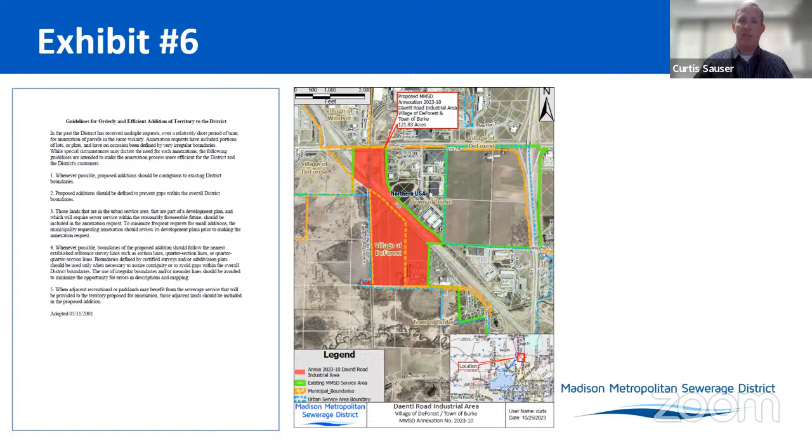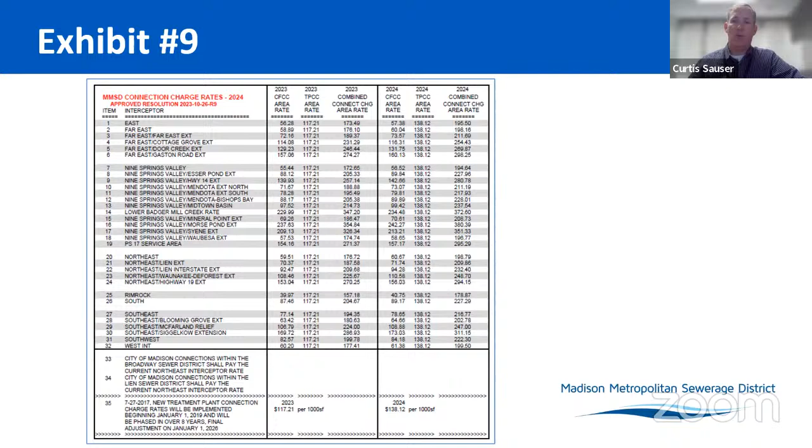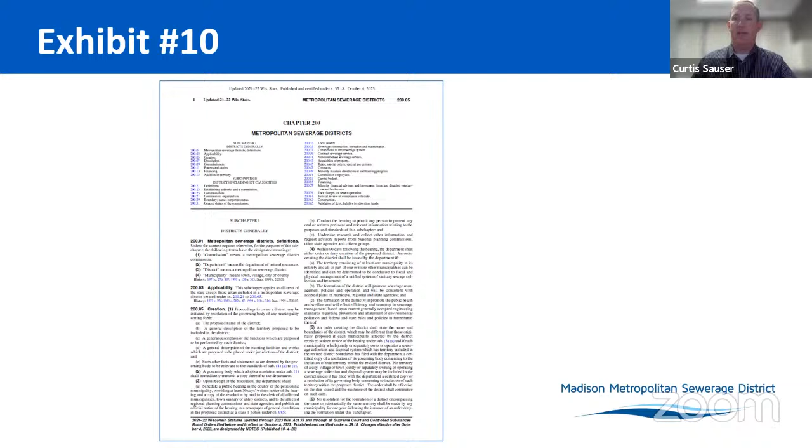And that is all I have to present today. Are there any questions? Okay, thank you, Kurt. Anybody have any questions for Kurt?

Tom? Yeah, just a simple question, Kurt. You know, I couldn't tell from the map and I didn't drive out there. Are there any current buildings that would connect to this, or is it all going to be new commercial construction?

I think the applicant could probably answer that question better, but I know there was a residence in the town of Burke, kind of a flag parcel to the southwest that may be connecting. But I'll let the applicant describe that in better detail.

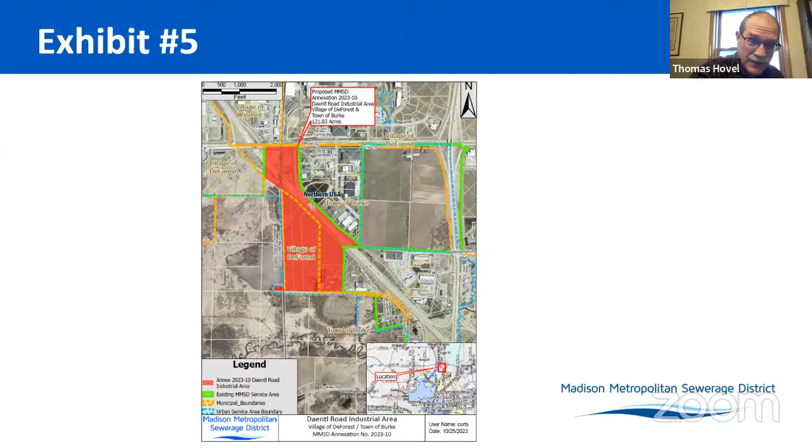Right, okay. So essentially there's not a significant amount of land - you've got an area that's in the district, and the area to the east is out, but then the area to the west you're bringing in. Okay, thank you. You're welcome.

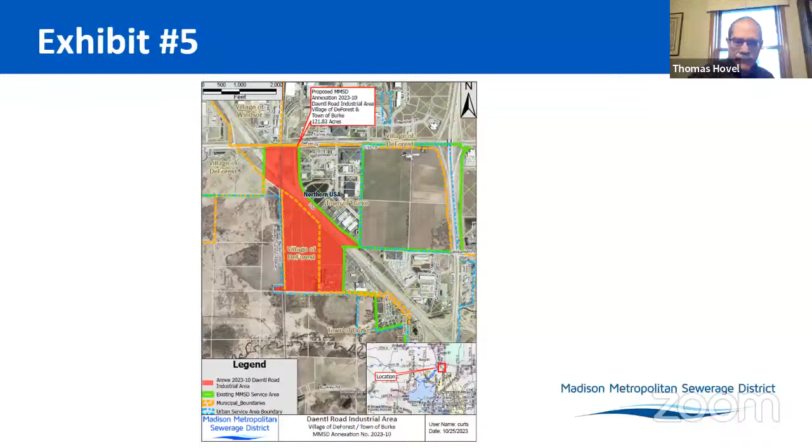Are there any other questions by legal counsel or by members of the commission? Mr. Kent, are there any questions on your end? I have no further legal questions. I've reviewed this in light of the statutory standards, and I have no further questions.

Okay, Mr. Chang, would you have any more questions or comments you'd like to make? And then I'll turn it over to a question by Commissioner Rummel.

Yeah, just simply that we're happy to be here this morning. We are asking for the annexation of the Daentl industrial area to be annexed to the MMSD. Again, we appreciate the opportunity to come before you.

Thank you. Commissioner Rummel, thank you, Chair.

I have a question out of curiosity as a newer member. In the CARPC letter, there's a chart with an X because of the gap. I'm curious when it is that CARPC would say this doesn't meet standards. It's obviously more than one check, but just for background, whoever can answer, thanks.

So I'll go through that chart. Those checks are the criteria set by the commission. They aren't CARPC standards, just guidelines the commission likes to follow, but they aren't hard and fast rules as to whether or not annexation should be approved. I like to provide that background to the commissioners to weigh against the rules they put in place, so you can make a good decision.

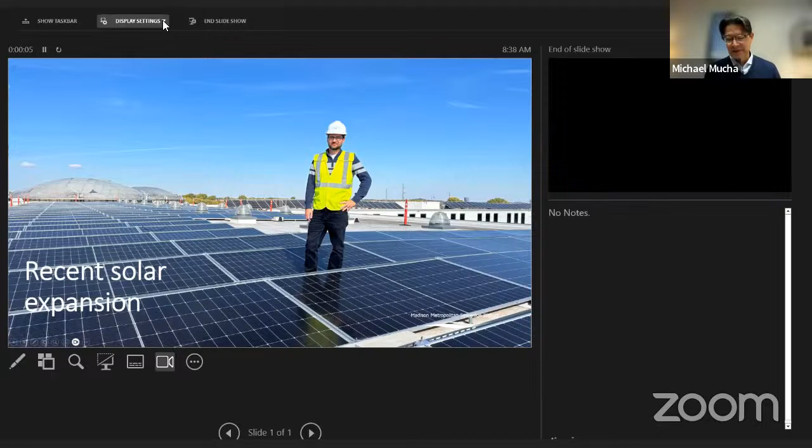Then we'll move to the Chief Engineer and Director's Report, CED update. Michael? Thank you, commissioners, for that action, I appreciate it. I have two items. One, at the meeting last week, I provided really good news on our recent solar expansion project, and Commissioner Freeze had a question that I couldn't answer, and that was, what is the return on investment for this project?

The investment will yield more savings than costs, and will recover our costs in 6 years before the expected lifespan of the equipment. The expected lifespan is 25 years. I do want to point out, though, that if electricity is more expensive, that payback period will be even better in the district's favor. It does not account for the avoided cost for reduced carbon emissions. If we did that type of analysis, the payback in terms of environmental costs would be much better and much more positive. So I wanted to follow up on that, and pause there to see if there are any other thoughts or questions.

Ezra, you have your hand up? Yeah, thanks, Michael, for looping back on this. Quick question would be, are we cash financing this project, or is it debt financing? I'm just kind of curious. Oh geez, I think it's cash, I don't recall. This is Lisa, I think it's cash. I know we're getting some grants for this project, but Lisa, go ahead. Yeah, sorry to interrupt, I think it is cash financing. We are getting some grants for it too. Great, thank you.

Thank you for following up, Michael. I appreciate it.

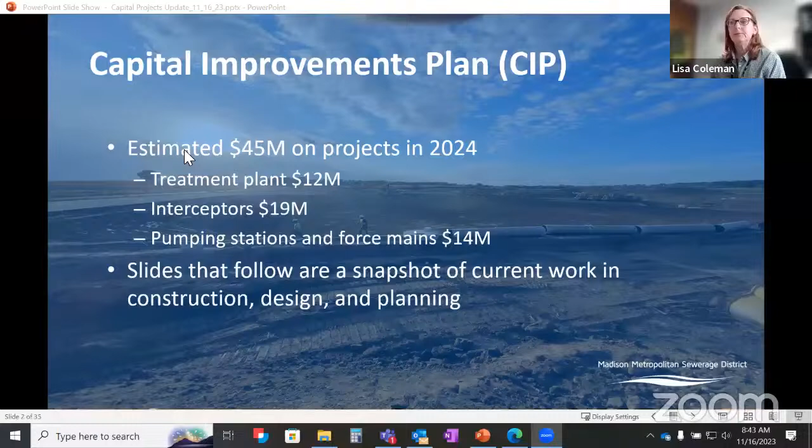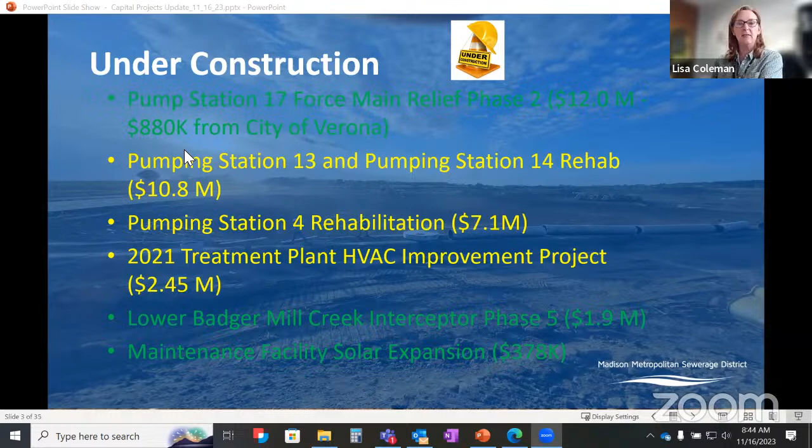Before I get into the details on some of the projects, I wanted to give you a general overview of the pumping station 17 area, as I'll be talking about 4 different projects today that relate to this. We've been working on several projects to upgrade the service area to pumping station 17. When pumping station 17 was built in the 90s, it took the place of the Verona treatment plant and was anticipated to serve a smaller service area. But there's been lots of growth, and lots more growth anticipated in this overall gray area, which is partially city of Madison, partially town of Verona, partially city of Verona, and also town of Middleton. Planning for all this growth has been ongoing for decades.

Some of the northern parts of this ultimate pump station 17 service area developed earlier, and there was a kind of temporary solution implemented at that time by the city of Madison. They have a local pumping station, the Midtown Lift Station, which pumps to a different sewer shed, to a different pump station. This was built as an interim solution until the future district pipe interceptor could be built to convey all that flow via gravity down to pump station 17. Commissioner Freeze probably knows way more about that than I do, so he remembers when all that was happening. And I actually remember when some of that was happening when I worked at the city too.

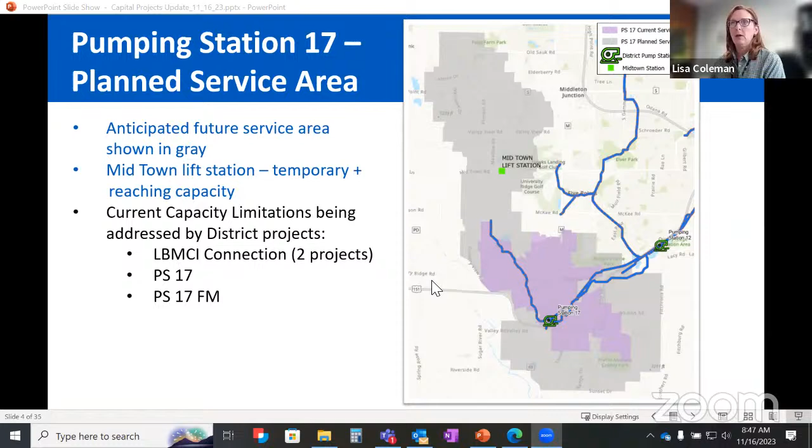Pumping station 17 force main relief phase 2. This is the first construction project underway that I want to give a little bit more detail about. This is a relief force main, meaning we already have one force main and now we're building a second for additional capacity. You may recall we completed the first phase of this project in 2022.

To the west here is a map showing where the force main goes. The phase 1 project was to the west, extending from pumping station 17 in Verona up to this point at the end of the second phase. That project was completed in conjunction with the city of Verona leading the project, since they were at the same time building their East Side Interceptor project. The current project is picking up where we left off and completing the rest of this pipe.

As far as scope, this project is about 8,000 feet of 24-inch force main, shown in red on the map, and 3,300 feet of interceptor, shown in green. It's basically pumped through here, and then when it gets to this point, it flows downhill via gravity to where it hooks up with the Nine Springs Valley Interceptor, and flow heads off to the east from there.

With regard to schedule and status, construction started just this month, so that's very exciting—we've been working on this for a long time. Probably most of the pipe work will start in January. Right now they're just getting set up and mobilizing, but the real serious construction probably isn't going to start until about January.

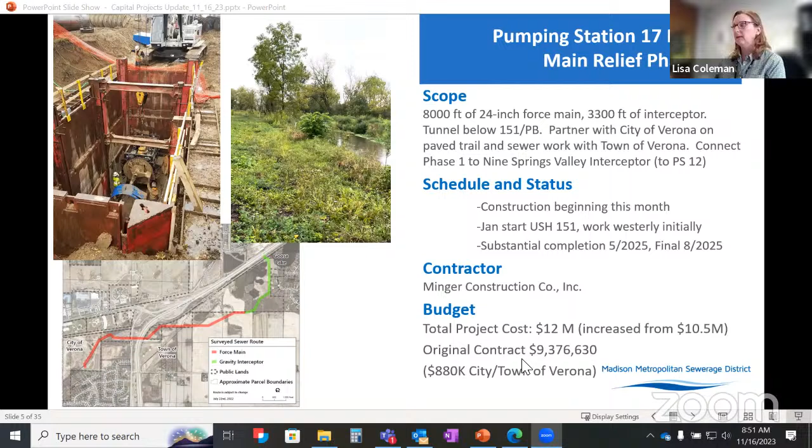One of the nice features about this project is that we worked with a lot of other partners to make improvements along the route that will happen during the project, and some after. Here's a map showing some of those improvements, and our project engineer Rachel worked really hard with all these stakeholders to facilitate this.

Some of the improvements: the City of Verona is doing this paved path, which is part of that cost sharing we talked about. The Ice Age Trail folks are working with us to relocate the Ice Age Trail through here. There's also a number of native plant restorations happening during or after the project in conjunction with the county and the Friends of the Badger Mill Creek Environmental Corridor.

I think it's going to turn out really nice. Some of the restorations are prairie restorations, and there's an oak tree line restoration that's going to happen too.

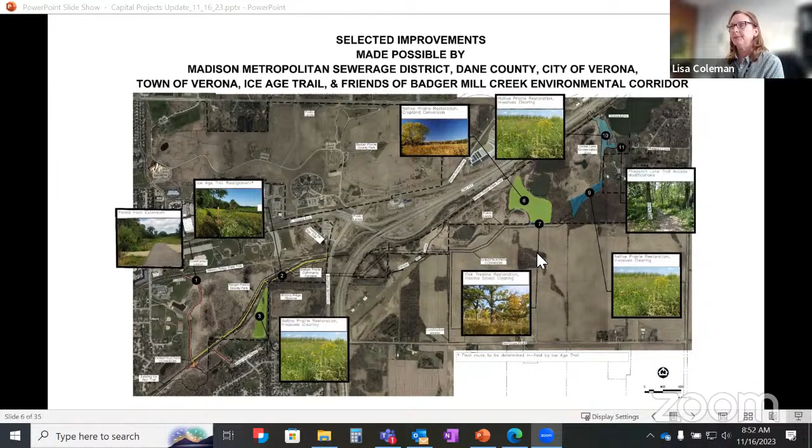Switching gears, let's talk about a construction project that was just completed. You should see an acceptance of work item for this one coming soon. This is pumping station 13 and 14 rehabilitation.

Both of these pump stations are on the far northeast side of Madison. Pumping station 14 is up here on School Road, and pumping station 13 is down here on Amelia Earhart, right by the runways for the Dane County Airport. This is Stoughton Road here, and the airport runways over here.

The scope of this project was replacing pumps and Venturi flow meters, lots of major electrical and control equipment for the stations, and HVAC replacement—heating, ventilation, air conditioning. We also added new emergency generators at these stations with diesel tanks, did some wet well repairs, and some building and site work.

The project began in October 2020, so that was a while ago. This project was one of the first inklings we had of the supply chain issues that came along with the pandemic. We had major equipment delays—some pumps and motors took quite a long time to come in, and some electrical equipment also took a long time.

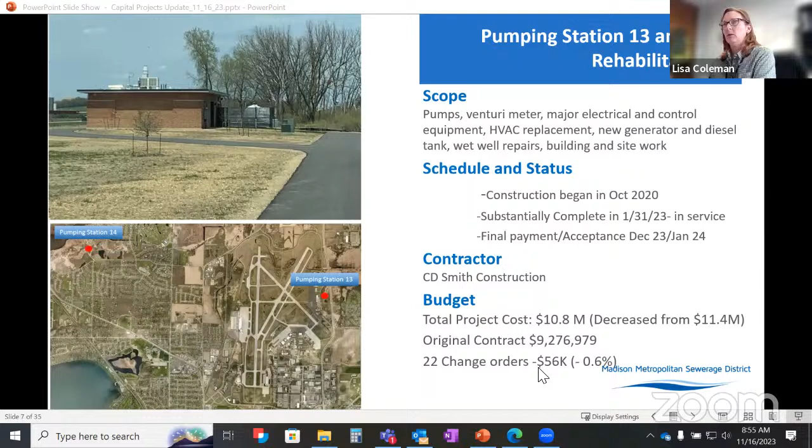Okay, on to another pumping station project that's currently in construction. This one is pumping station number 4, on John Nolen Drive. You can see the location right here—it's right by the Holiday Inn hotel across the street from the Alliant Energy Center, and then a little bit over, the next neighbor over is the Sheraton Hotel.

So kind of in that area, sort of tucked in next to the Holiday Inn's parking lot. You might not notice it unless you happen to be a commissioner, and then you probably would. The scope on this project is pumps, motor control center, instrumentation and controls, HVAC work, another new emergency generator at the station, and some building and site work, including correcting a drainage issue.

This Holiday Inn parking lot has some runoff that runs towards the station that causes problems, so we're going to correct that drainage issue with the project. We bid it right around this time last year, issued a notice to proceed in January of 2023. We were hoping for substantial completion in June of 2024 with final completion in August of 2024. However, no surprise, we're now anticipating some delays due to supply chain issues, in particular the motor control center.

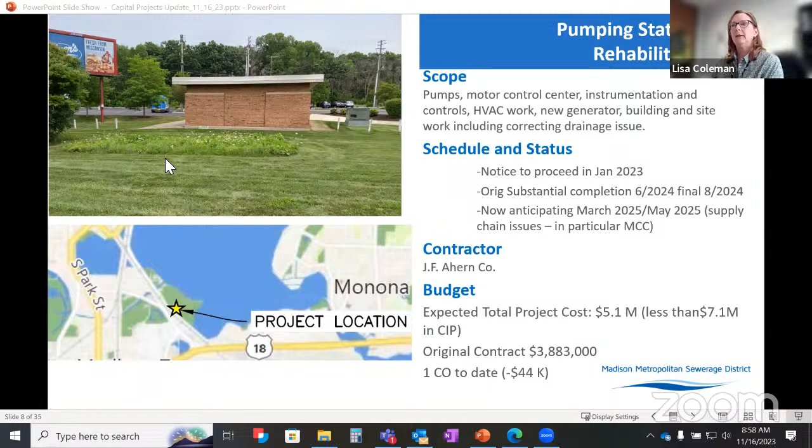Okay, so the last in-construction project I'm going to talk about today is another one of those projects relating to Pumping Station 17 service area that I alluded to a little bit earlier. This project is the Lower Badger Mill Creek Interceptor Phase 5. And again, this is the interceptor that carries flow down to Pumping Station 17.

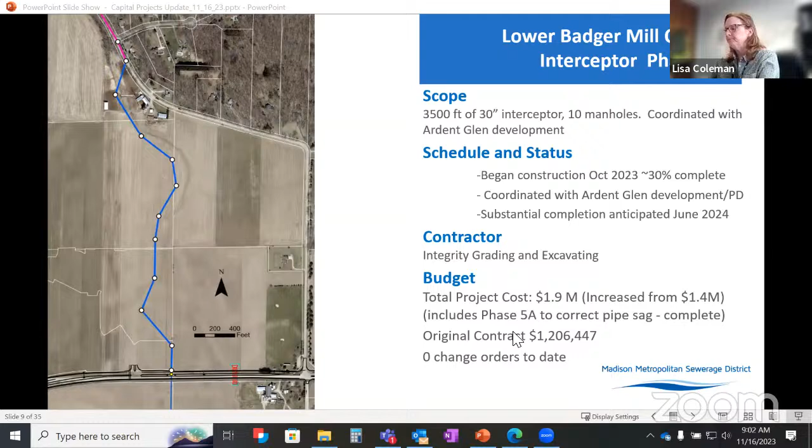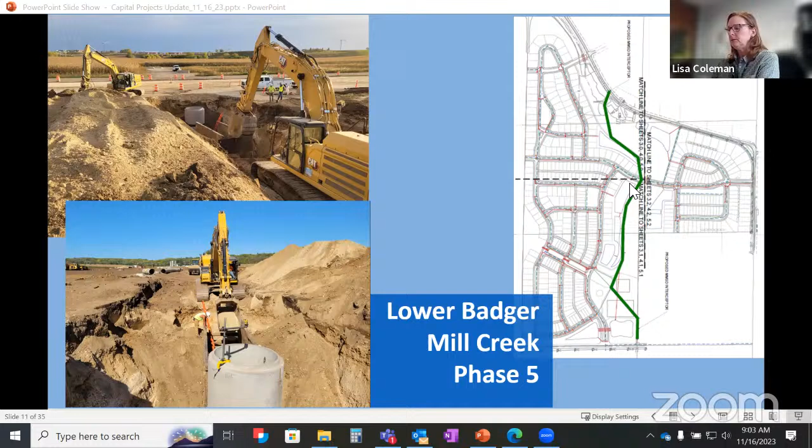First up is a big one, liquid processing improvements phase 2. This one is at the plant, and the scope is really the second part of implementation of the liquid processing facility plan. You might recall a couple years ago we finished up liquid processing improvements phase 1, which had to do with a lot of hydraulic improvements, and also the ultraviolet treatment system in the effluent building was addressed at that time. This is kind of the next chunk of work that goes with that liquid processing facility plan, concerned mainly with the aeration system and the primary treatment infrastructure at the plant.

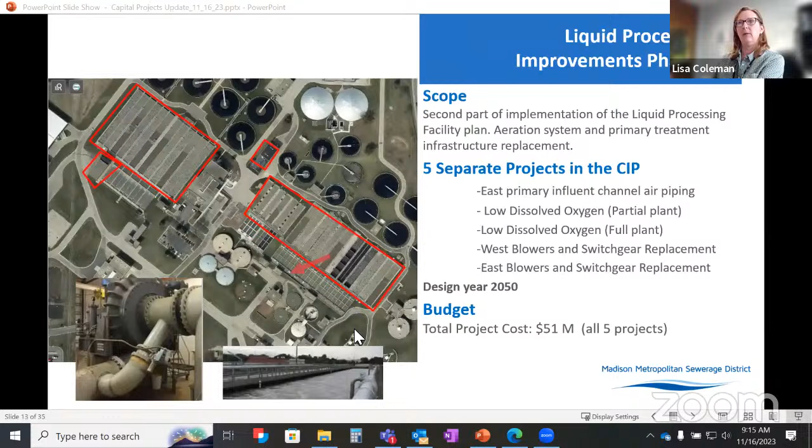And again, transformers, I'm way outside my knowledge base here with electrical stuff, but the transformers are really kind of what steps down the voltage, and then switchgears are kind of like the electrical box at your house where you're turning stuff on and off, sending power to different locations in your house. So that's a really simplistic description, but it explains what we're talking about here.

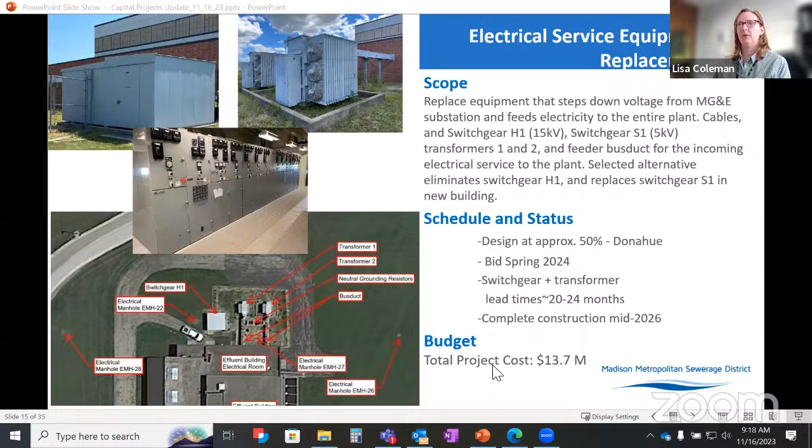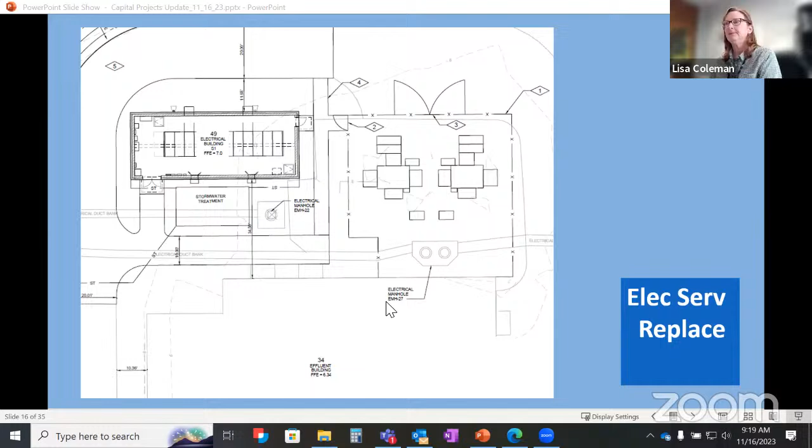Moving back out into the collection system, now let's talk about the Northeast Interceptor Waunakee extension capacity improvements, phase 1.

The scope for this one is really upsizing capacity for a developing area. We are planning to build a relief sewer from the 113/M intersection up to Kennedy Road, and then a replacement sewer north of Kennedy Road. So in some areas we're adding a parallel pipe, and in other areas we're upsizing the current pipe. To plan for this, we took a wholesale look at the whole interceptor, not just the phase 1 part, to make sure what we're planning in phase 1 doesn't hurt anything we plan to do later.

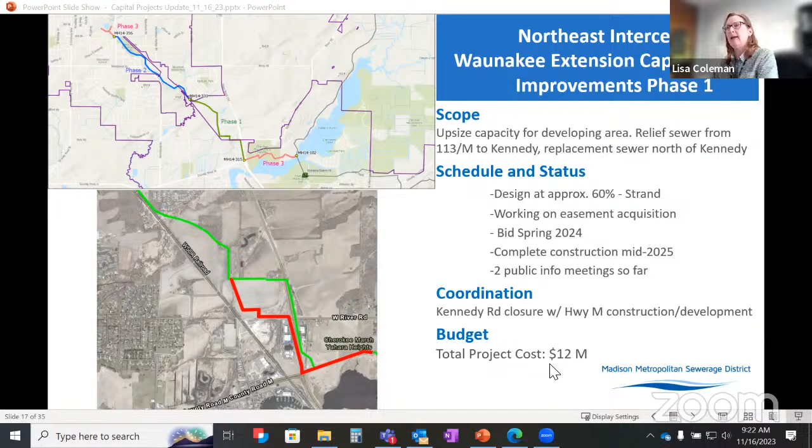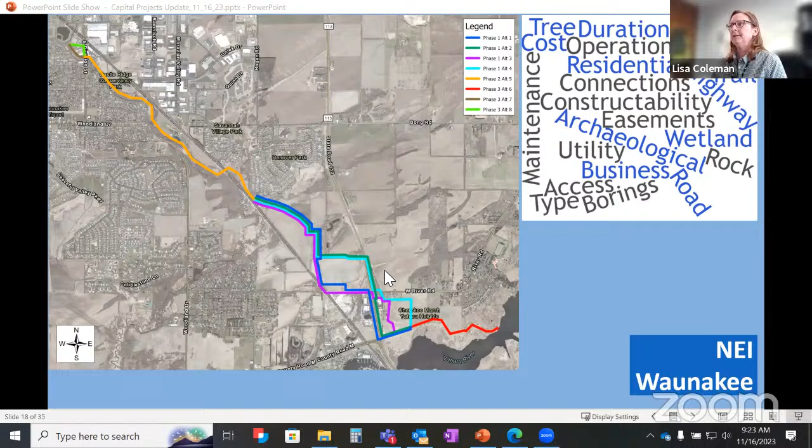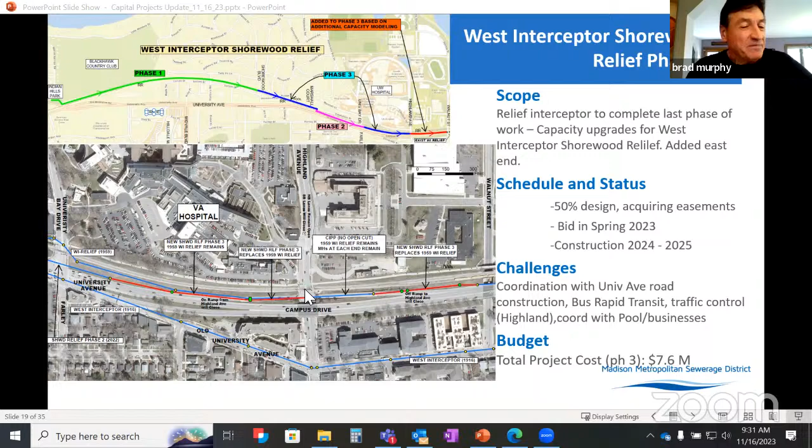Here's a zoom in of the other leg I was talking about - that's more the Shorewood piece. These almost function like two separate projects, with all the staging, traffic control, and coordination. This one goes right by the Shorewood pool; there's a bike path back there we'll be along. There's a big oak tree we've hopefully found a way to go around, which will be pretty tight - we'll actually be into the pool deck. There's also coordination with businesses since we'll be into their parking lot as well, so lots of coordination in these tight urban corridors.

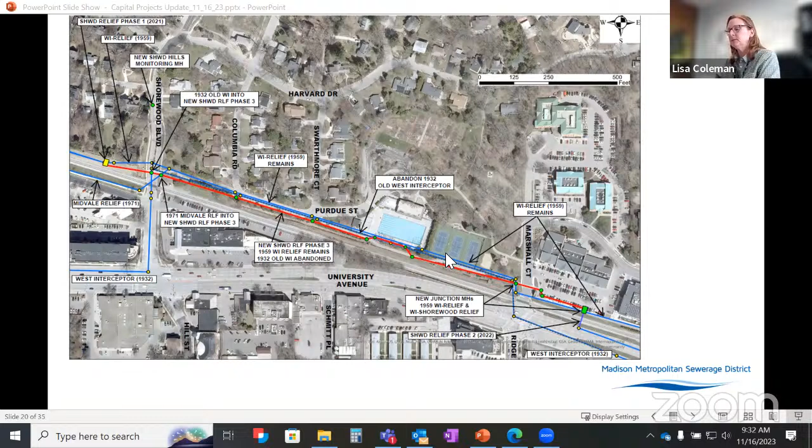It's located on Bruce Street in the city of Verona, where the old Verona treatment plant was located. This station was built in 1994.

The scope of the project is to increase the capacity of the station and replace equipment that's at the end of its life - pumps, variable frequency drives, motor control centers, grinder equipment, heating and air conditioning, a flow meter, and some process piping and valves inside the station.

This one includes a large vault that'll connect to the new relief force main we talked about earlier. The scope changed a little in 2022 to scale it down to a capacity improvement - we're looking here to increase capacity for the next 10 to 15 years.

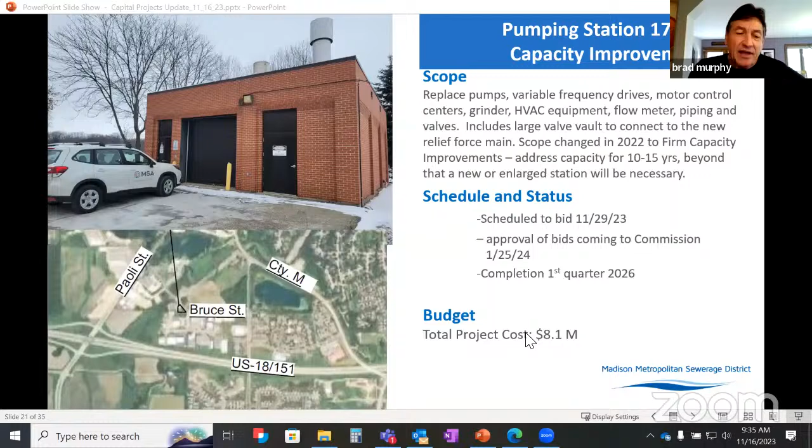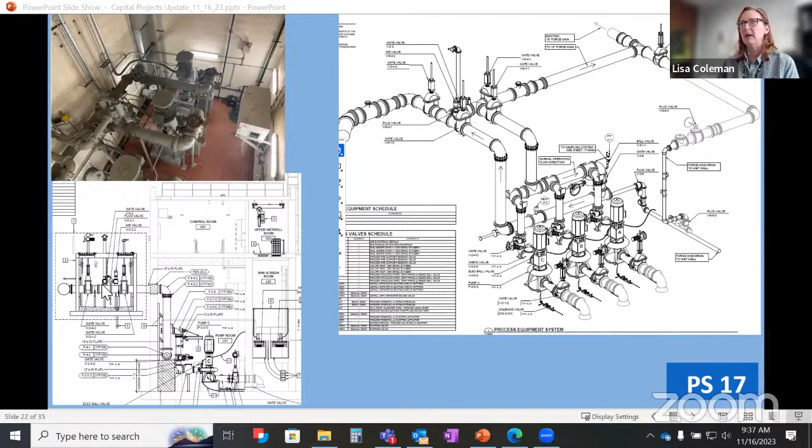All right, and now back to the plant. Now we're at the flow splitter. This is a critical flow control structure at the plant. It's near headworks, and it divides flow between the east and west plants.

So I'm going to flip to the next slide and show you a couple things, and then I'll come back to this slide.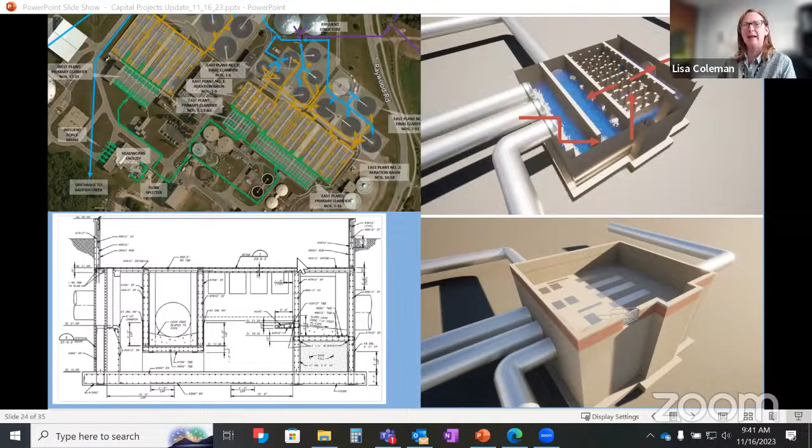So back to here, the goal is to rehabilitate the flow splitter. As part of that, we wanted to also be able to construct a permanent bypass. The reason is that if we can use that bypass during construction, it will reduce the duration of bypassing needed during construction, which will help us keep the cost a little bit lower. The permanent bypass is also nice to have if you needed to do maintenance on the structure later.

So for schedule and status, the alternatives analysis is complete, and we're into final design, about 40% through. As you can imagine, this requires some detailed sequencing and bypassing plans, because we can't just turn things off around here - the wastewater keeps coming. We're hoping to bid this in March 2024 and complete construction in the middle of 2025. We expect this total project cost is roughly $5 million.

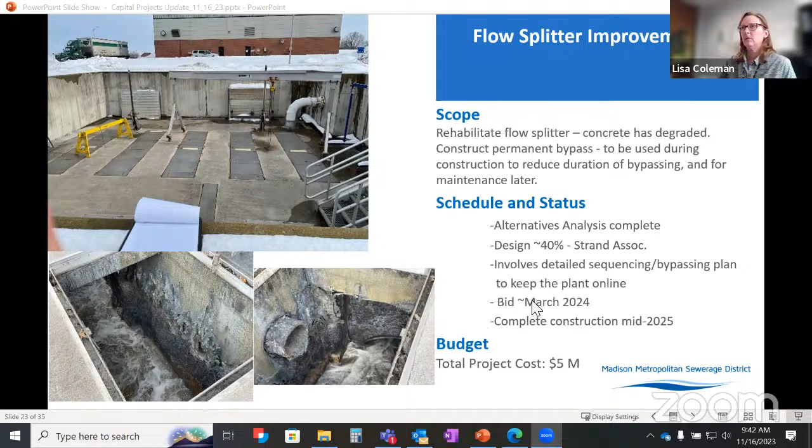So I already looked at this one, I'm not going to get into all these details here. I just want to mention that we looked at a lot of alternatives - lots of creative ways to try to bypass and build a different structure and build a permanent bypass, all of that stuff. But the one we ended up with is basically rehabilitating the existing structure and building a permanent bypass that we can use during construction and then also after construction if we needed to bypass the flow.

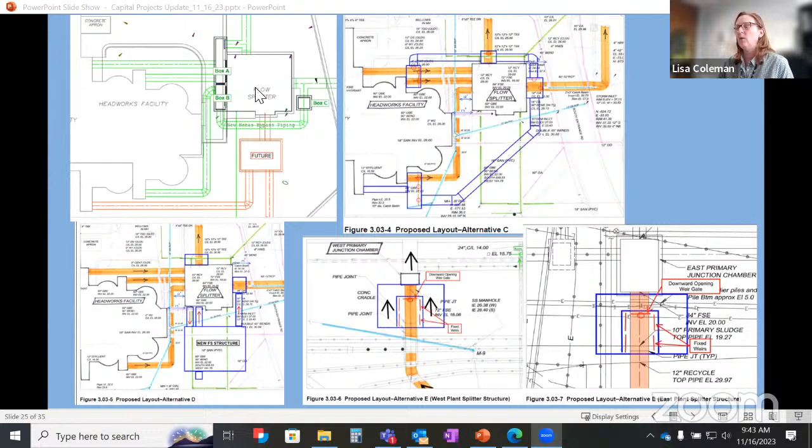Another aspect of this project is we're planning to uncover part of the structure so that we would have the ability to do easier inspections, because it's pretty hard to see in there right now. It would also have better venting so that we hopefully don't have that same issue again with hydrogen sulfide.

All right. Now this is the last of the Pump Station 17 projects that we will talk about. So this is that fourth one. This is the last collection system project and design that I'm going to talk about, which is the Lower Badger Mill Creek Interceptor Phase 6. So this is that very last phase, the last of the projects of that interceptor that's been being built sequentially over time here.

This is the missing link. It will start down here on the south end on Shady Oak Road, which is where phase 5 that we looked at earlier leaves off. And then it goes up here, it'll go through a ravine between some backyards of homes that are on Rolling Meadow Road and Nordell Hill Road. And then up here through some ag fields, and then up to Midtown Road, and Midtown Station is up here, and then we connect to the pipe that's further north that's not shown here.

So this is a 30-inch interceptor, as I mentioned, from Shady Oak to Midtown. We're working on finalizing the alignment. We're hoping to begin the real estate process soon, possibly next month or in January. You should see a relocation order item coming through to get our easements. We're hoping to begin construction in mid-2024.

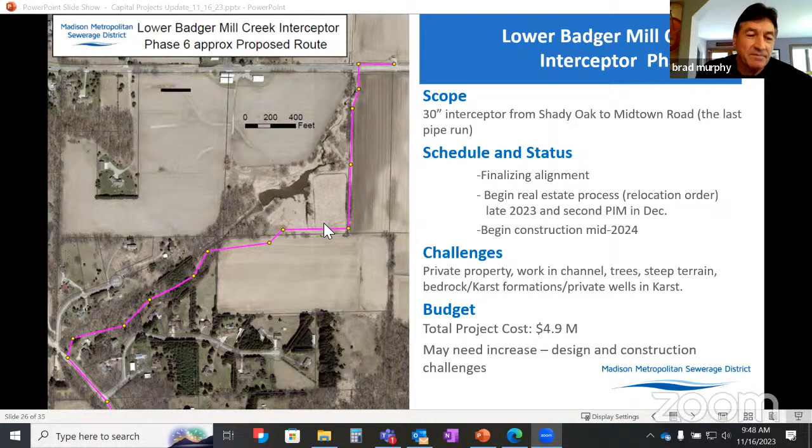So, heat and power improvements—we're just starting on this project. You might recall this was slated to begin in 2024, but we had an item a couple months back asking the commission to move it into the 2023 budget so we could start work on it, since it's such a large project. It's a long-running project, and we don't expect to complete construction until around 2029. The first step, which we're working on now, is to develop a facility plan, which we're looking to get working on next year.

So we're currently working on a request for proposals to hire a consultant to help with the facility planning step. For background, this will expand on some of the work from the Energy Master Plan a couple years ago. At its core, like all our projects, this is an infrastructure replacement project to replace infrastructure at the plant that's nearing the end of its life. But the question is really whether we want to replace the infrastructure similarly to how it is now, or not.

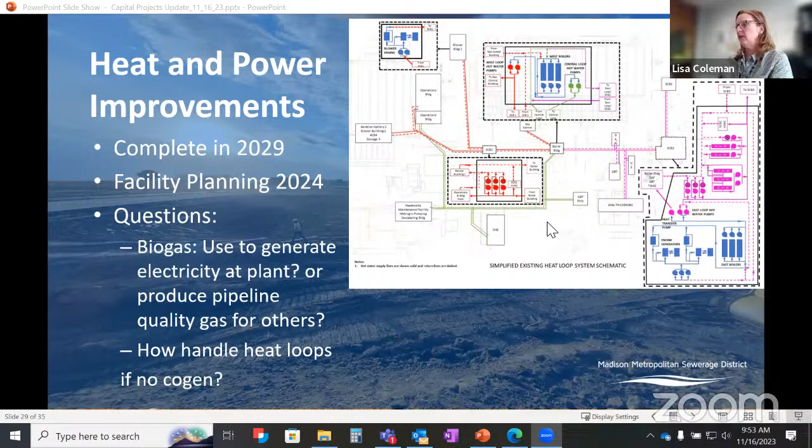All right, so we look forward to that one. There's a lot of interesting work coming up with this. And then the last project I'm going to talk about is...

The Lagoon Dike Improvements Project. The lagoons are located across Moreland Road from the plant. In this picture, the plant is way over here, and this is across Moreland Road. Here's the railroad tracks, and the Lussier Center and everything is down here. Many know this area as the bird watching area, if you're a bird watcher.

Commissioners who have been around longer may recall that the Far Lagoon, or Lagoon 2, is actually a Superfund site, containing capped PCB-containing biosolids. Commissioners may also recall that during the floods in 2018, the dike surrounding this area nearly overtopped by Nine Springs Creek, which runs through here and ends up in Mud Lake, part of the Yahara River chain. In 2018 the water got pretty high on those dikes, and that really showed the need for this project.

We've been working on this for the past couple of years, and the scope is really to increase the dike height, to increase resiliency from flooding, and to keep what's in the Superfund site inside the area. We need to raise the dike maybe 2.5 feet in the lowest areas, on the south side.

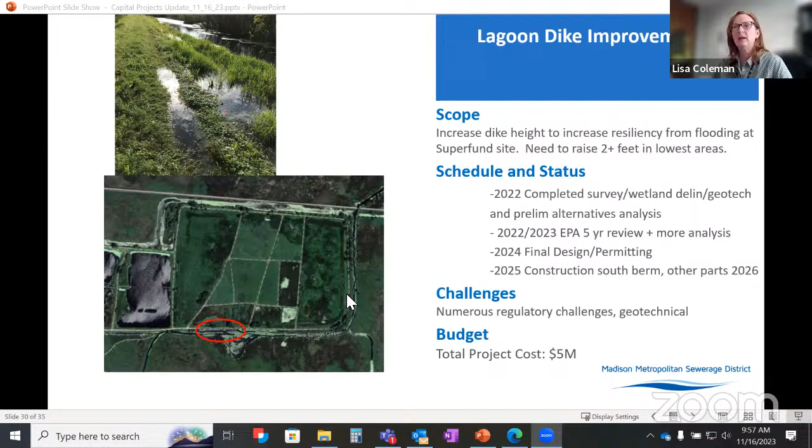I'm just going to show you some of the alternatives we're looking at here. These are just sketches of the alternatives we've been looking closer at. The top two here are cross sections of the berm as we're looking through. I don't expect you to read all the tiny print, but I'll talk through it.

And again, down on that south berm, we're looking at increasing the berm about 2.5 feet, which is easier said than done here. So the lightweight fill we're looking at—one alternative is a glass foam aggregate fill, which would have soil over the top.

The other lightweight fill alternative we're looking at is expanded polystyrene blocks, also with soil cover over that. So the idea with the lightweight fill is to try to increase the height of the berm without increasing the load on the foundation, because the more you increase the load, the more stability problems and settlement you get. That's the idea, to try not to increase the weight that much.

And then the third alternative here is a vinyl sheet pile flood wall. If you've seen a kind of seawall-type vertical sheet piling, that's what that is, and this one would be vinyl. Basically it's there so that when the creek level goes up, it provides a way that the creek isn't just overtopping the berm. So there you're not adding a lot of fill, you're not adding a lot of weight.

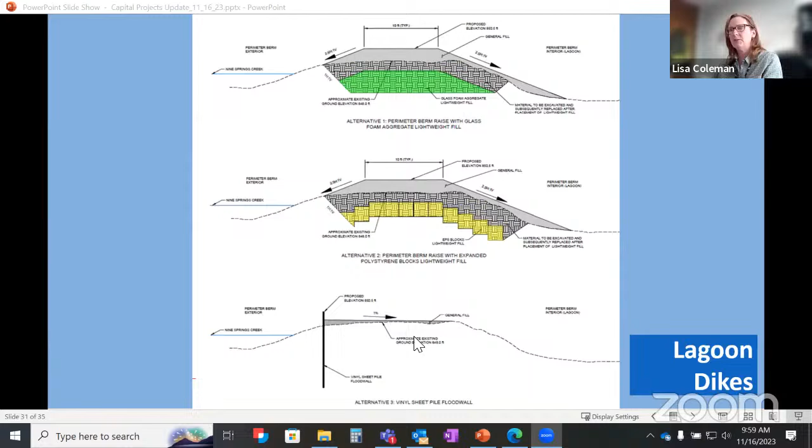All right, and with that, I have no more projects to present. So thank you very much for the opportunity to give you an update on all of our capital improvement projects.